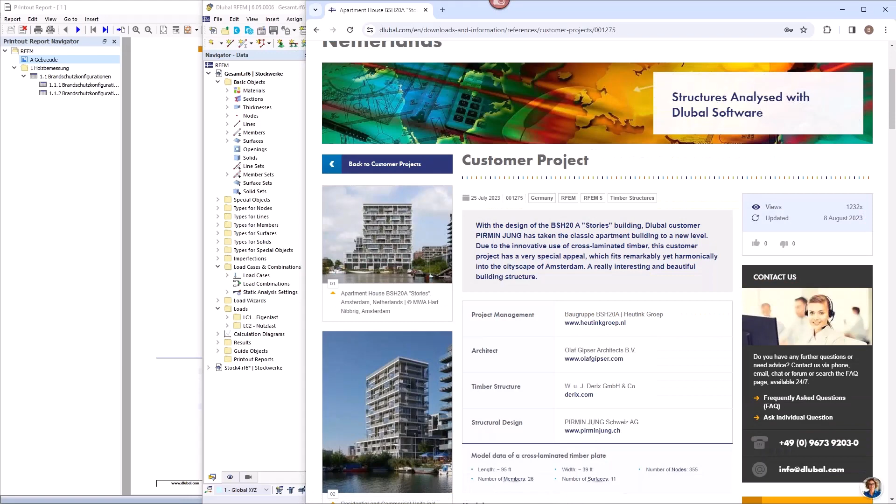Okay, so then I will shut off the camera and jump into the program. Before we jump into the program, the project that I want to show you is also on our homepage under customer projects. It was built last year. The static analysis has been done by the engineering company Pirmin Jung. They're using our software, that's the key. And this is the building, 13 stories.

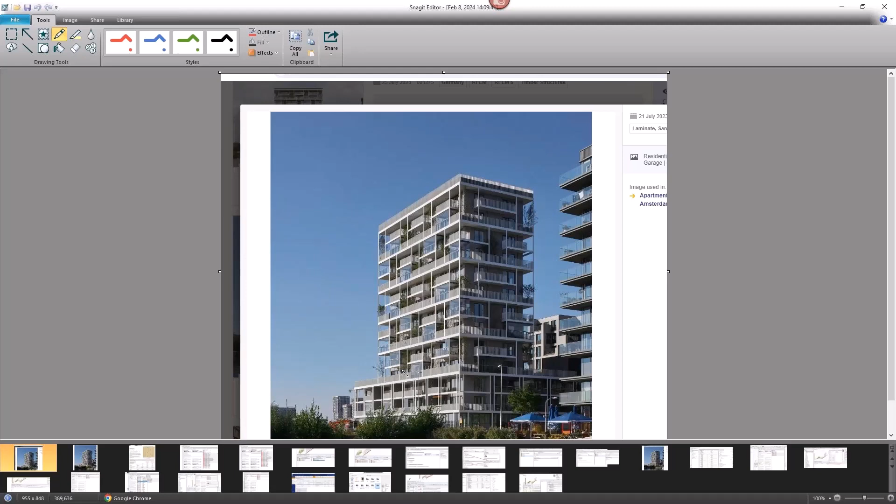The point we want to take a look on today is that there is, or what makes the building quite interesting, is that there's a smaller part that is upon the bigger part, and we want to take a look on this story 3 here. So how can you do this?

You can first of all make it with model in 3D and regard all construction analysis stages in the 3D model, or you can model it 2D and then connect each story via the option load transfer. This is the option I'm choosing here today. Today I'm only looking for vertical deformation forces, not horizontal forces for the stiffening of the system. I want to do that in a separate webinar later this year. Today, only vertical deflection and vibration, so wind load and earthquake we will not consider here today.

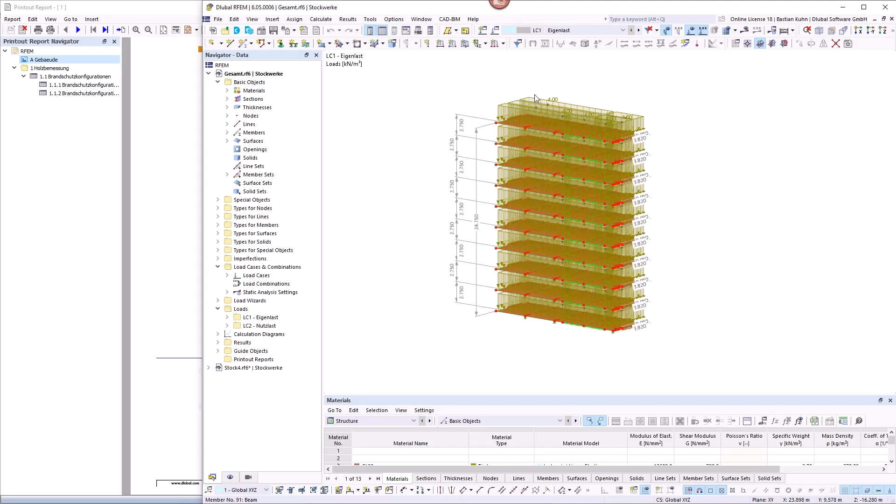As I said, I want to calculate that in a 2D structure, but with 3D effects. To give you an imagination of the structure, I just copied the top stories 4 to 13 in a separate position, so I make a simplified load case there for the self weight, 4 kilonewton per square meter, and the live load, 2.25 kilonewton per square meter, in each story. This gives you approximately a height of 25 meters for stories 4 to 13.

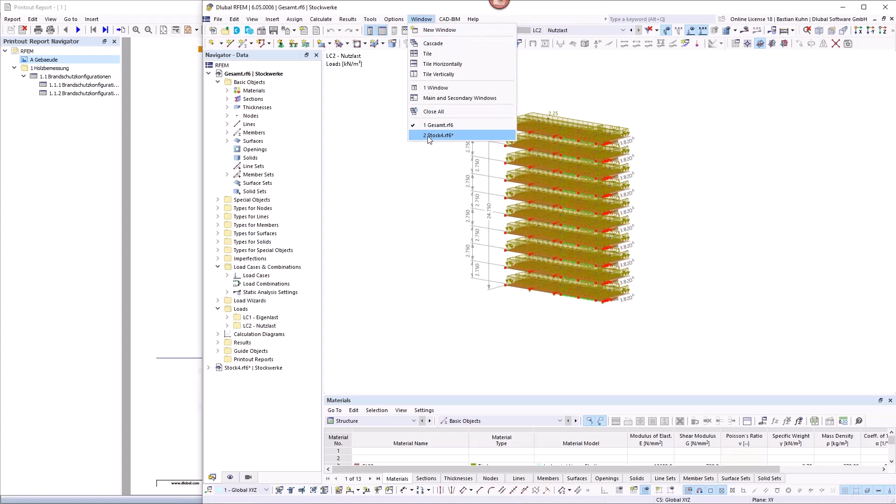Now how can you get the force from story 13 to story 12 and so on? Therefore I created separate 2D positions. Here is story 4, and I'll summarize them all - let me show you in the Windows navigator. So I have story 4, story 5, story 6, 7, 8, 9, 10, up to 13, and connected the forces from the top story above story 4 via the function 'import support reactions'.

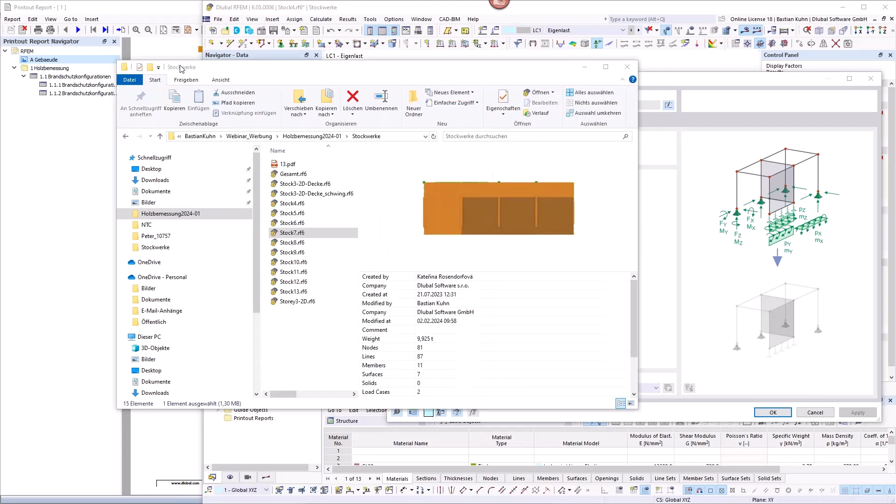There I can say, okay, I'm connecting story 5 here, so the resulting forces from story 5 go into this position, story 4. Then I can say, in the model with story 5, I have support nodes, support lines, and I'm importing them to the current model right here. I can automatically transfer the load case from load case 1 to load case 1 in the new story, and so on. This is how it works.

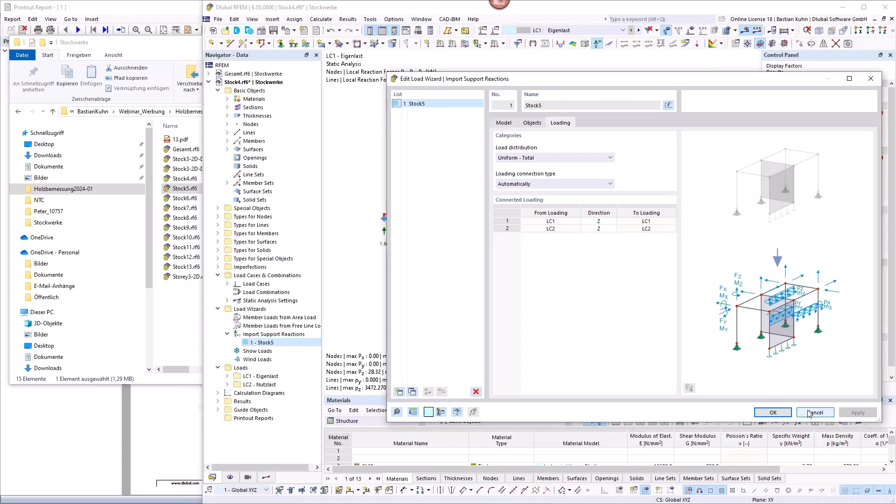I will put on the forces, or the load, and here you can see that I have point loads and line loads. If I activate it, I also have surface loads - as I mentioned, the 4 kilonewton per square meter for the self weight and the 2.25 for the live load.

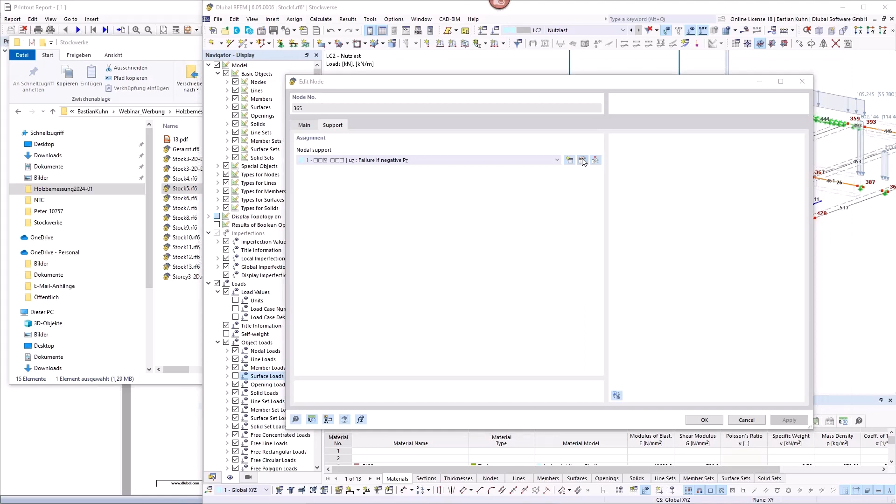But we just want to concentrate on the load that's coming from the other stories. You see here that in this part I also defined nonlinear nodal support behavior. It would also be possible to regard the settling or the construction stage via a spring constant here. All these points would be possible to regard and still transfer the load from one story to the other.

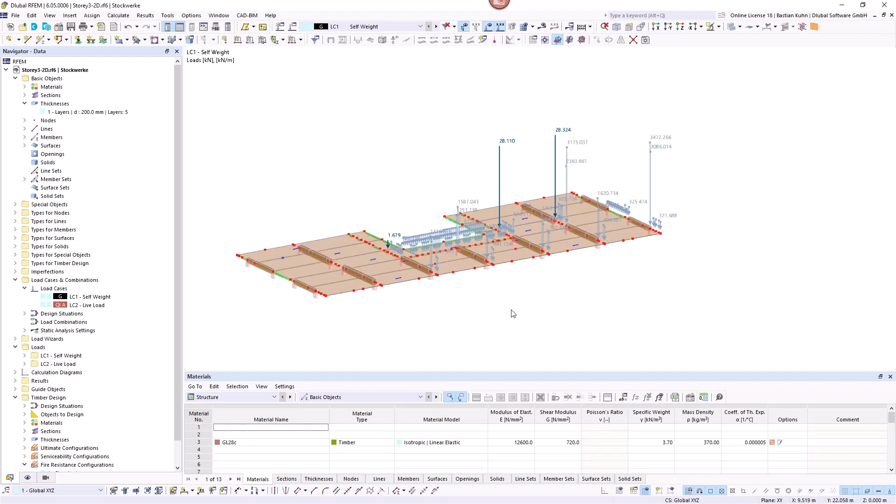Now when we go into the position that we want to analyze today, I think it gets much clearer, because I know it can be quite confusing, especially if you have not seen it before or did not work so often with RFEM 6 before. You see here, I'm in load case 1, self-weight. Also, when I activated the force in the first load case, 4 kilonewton per square meter, and 2.25 in the second load case. These are the only two load cases I want to analyze today. I said it is a simplification today.

I think the easiest way to understand what I'm doing here is to take a look at the point load. So we have 1.68 here and 28.11 there. Now when we look at the previous model from story 4 and take a look at the reaction in load case 1, you see that I have 1.68 here, and if we turn it around a little bit, 28.11 here.

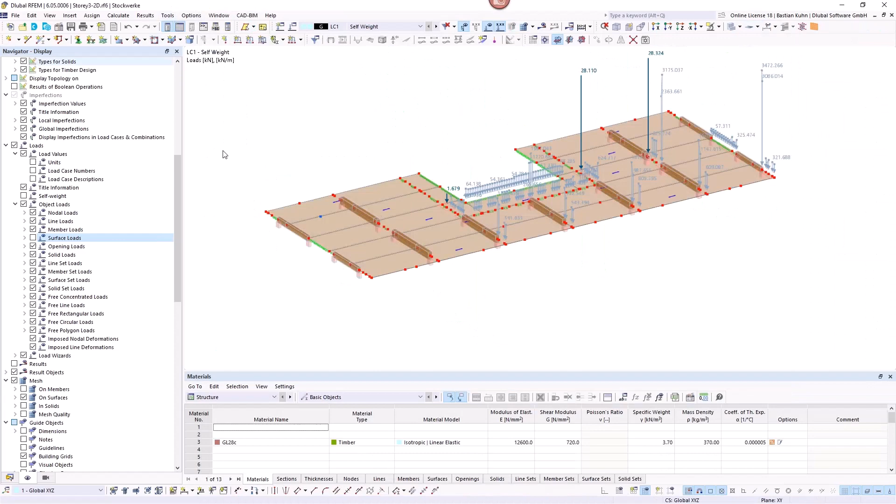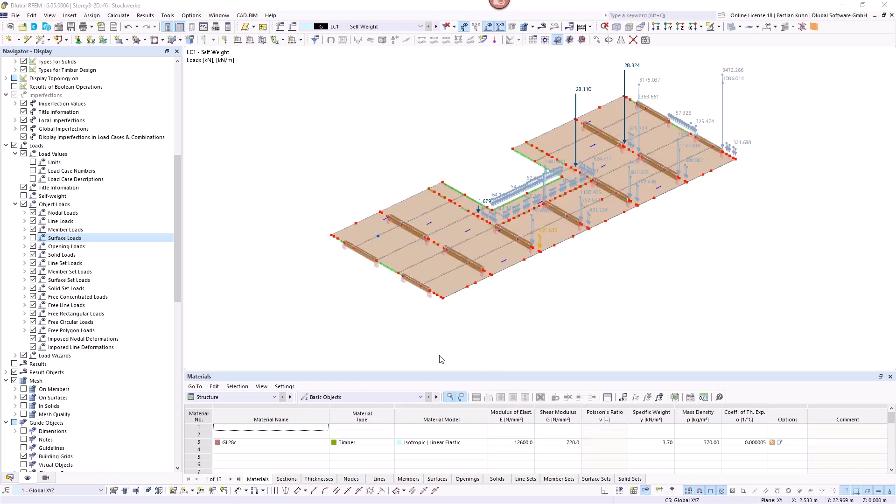Okay, to the structure itself. Now that we already have a whole bunch of questions, it's hard for me to follow them all. All right, there they are. I would like to show you also the dimensions of this structure that we are analyzing today. Therefore I just shortly switch them on. It has a length of nearly 30 meters and a width of 12 meters.

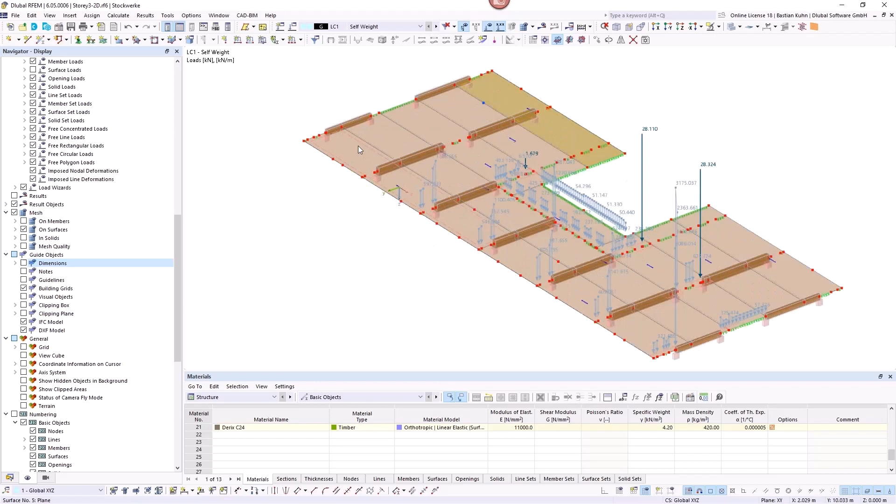I have several CLT plates in here. They are divided in an order so that they also can be produced and brought to the assembly. That's essential, that this is possible. And they are connected between those connecting points via screws, and the screws in our software are modeled via line hinges. There's another webinar where I get into this much more detail and also use a script function in order to calculate them. But today I just took the spring constant over from the existing project. So in X and Y direction, I defined this spring in here. So that's why it's connected.

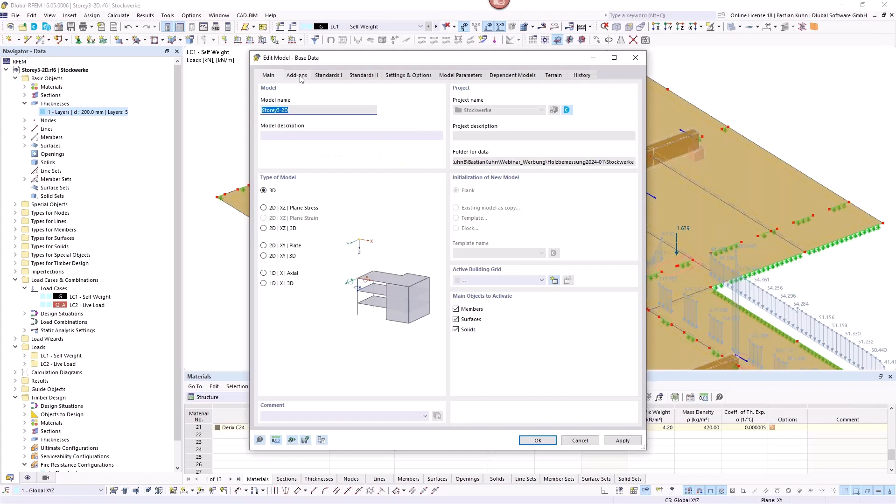The CLT plates themselves I generated with our add-on multi-layer surface. Maybe I'll go a little bit into the base data here. So it's this add-on multi-layer surface, and I'm designing all this stuff in the add-on timber design. When I define this layer, I have a database here with all the producers that we are offering right now. So you see, it's even possible to have a producer from Switzerland, maybe not this one, Schilliger, for example.

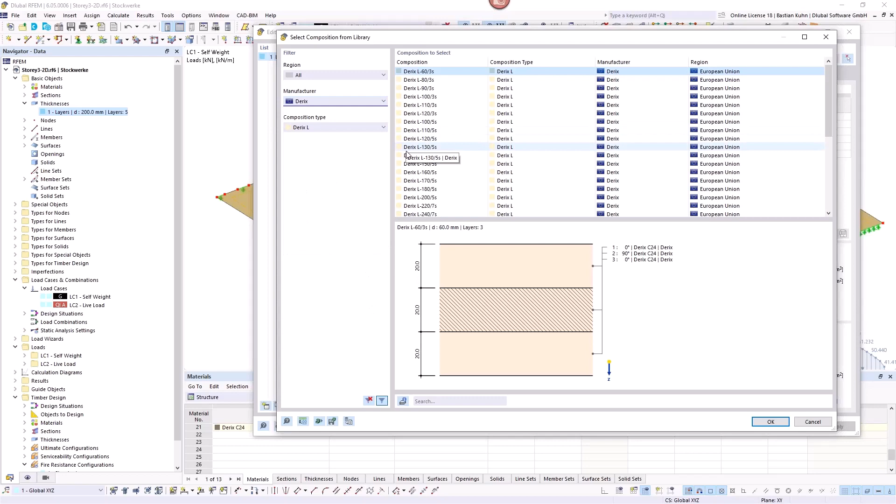But of course, all the European producers. And if you want to design in America or North America, Canada, then you can also have producers from there. Right now here, I choose the plate from the company Derix. And this gives me a certain amount of stiffness. I have other options here to regard the failure of net sections and failure including contact surface.

This is once again more for the webinar of the stiffening system for horizontal load, and I don't want to regard that today. But what I want to show you is that these layers here will generate a stiffness that we export into RFEM. So you see that this stiffness, if we're just looking for the top bending elements here, D11 is way more stiff than D22. So the stiffness in X direction is higher than in Y. That's timber, right? Obviously, there's nothing so fancy and new.

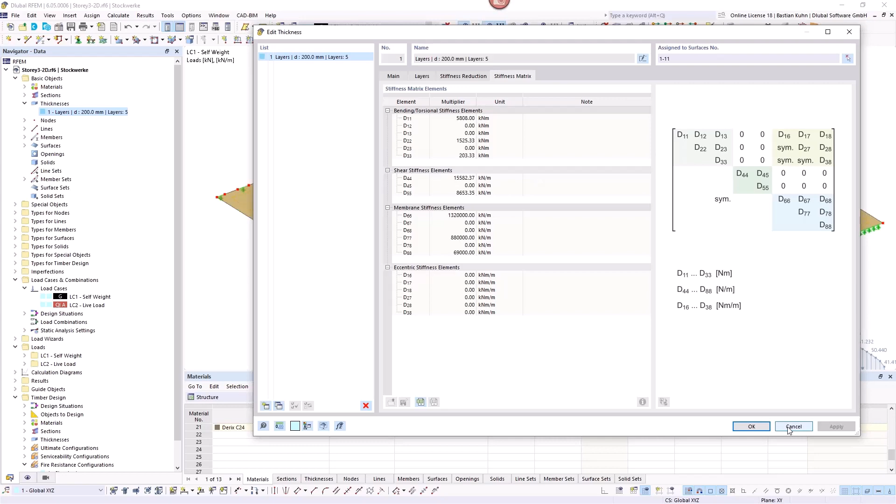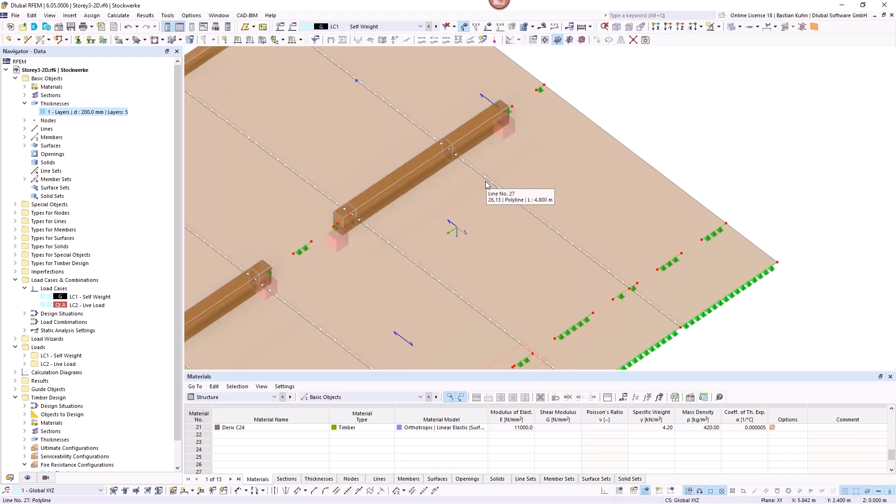But now, as a designer working and constructing it, you probably already realized the blue arrows here. In previous versions it was always hard to know how I'm assigning the plates. If we look for the downstand beams that I have underneath those plates, you see that there's a downstand beam supporting this plate, and this plate, and this one. Because of this connection point here, it would not be possible to design it economically without this part. That would be quite hard. At least with screws, it can be a problem. And therefore this beam was arranged here. It's a continuous beam from this point to this point.

And now when you want to arrange the stiffness, you probably say, okay, I have the span in global X direction, that's where I want to arrange my stiffness. So it's completely right what we did in here.

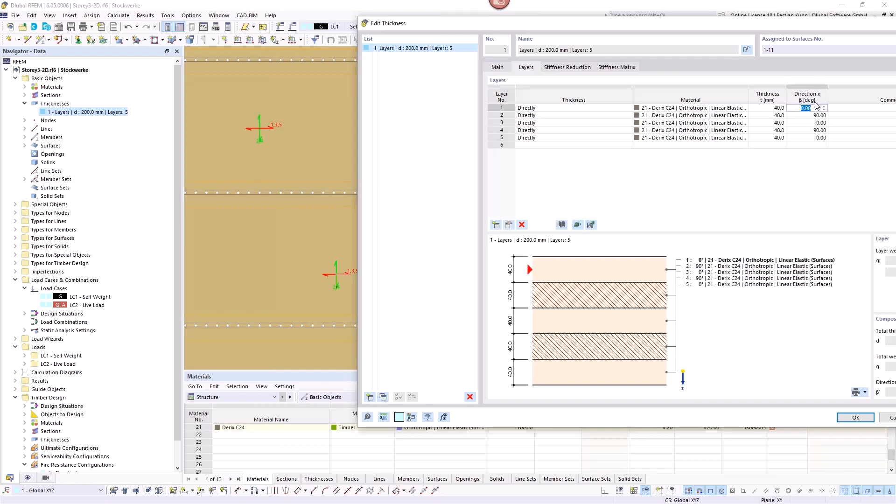We can also have it much more detailed if you want to look at each layer. I would just directly jump back to the thickness again, or maybe I can even have it here and then jump. So you see my first layer is oriented in 0 degree, the third one is in 0 degree direction, and also the fifth one. This is then the red arrow here, and the soft layers of the structure, which has less stiffness, is in this direction.

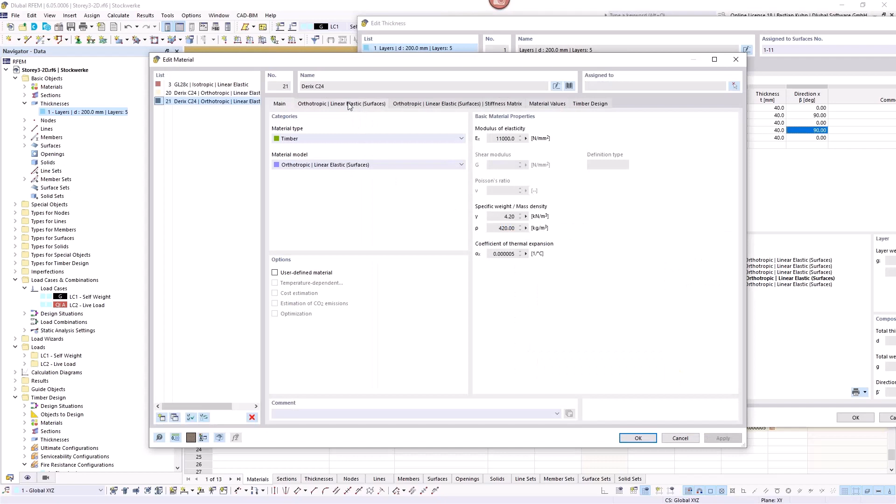I don't want to get too detailed, but in a CLT plate, you are always regarding the stiffness in X direction. Because of the orientation of 0 and 90 degrees, you still have stiffness in Y direction. You saw that in the stiffness matrix.

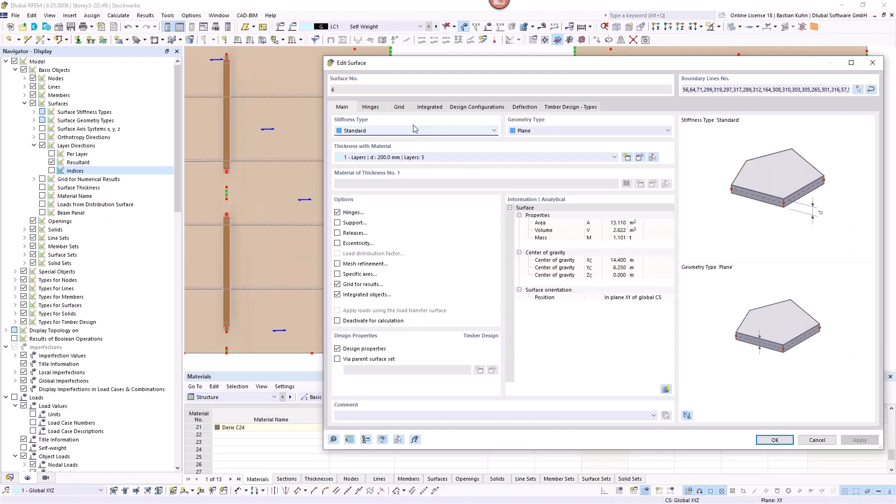So what I actually wanted to show is that you will directly get comfortable with the stiffness direction, and then as a constructor, you can directly see, okay, here it's correct to orient it this way, but here probably not, because there I have supports completely over the whole length, and I also have supports here, and there I definitely want to change that. How can you change this?

If you assign a specific axis and define it here by 90 degrees, the whole composition is changed, and you see it directly that the stiffness works.

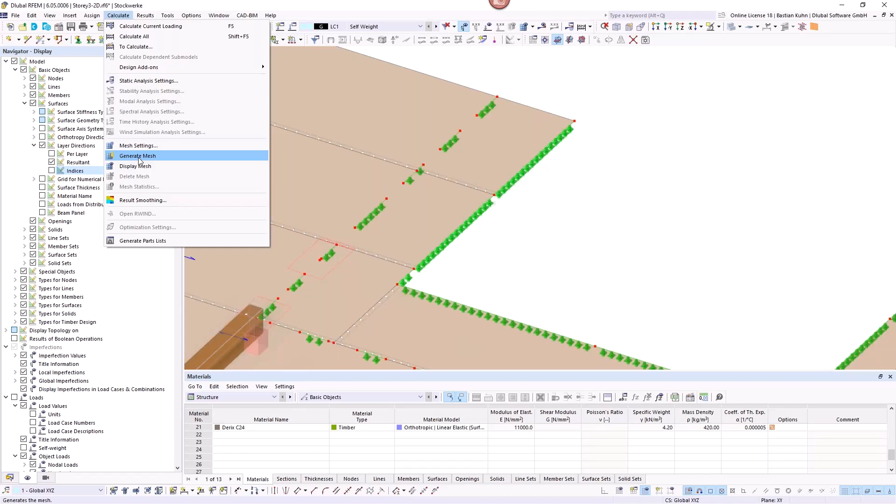All right, that is the plates. I also defined supports, well just simplified, also only vertical and not movable in X and Y direction, because I think as we are only looking for vertical forces and deformation, this is okay. I will generate the mesh just to show you another part of what I made in this model.

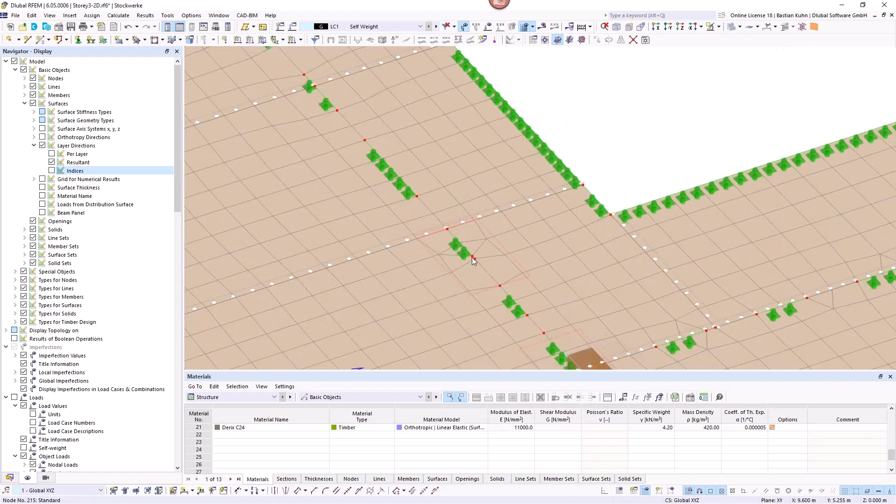I did take the whole load again, the example of the point load of 1.68, and defined it with a tiny little eccentricity to the support. In reality, when constructing this, you probably do not assign it to this node, what's the number... 439, you would probably assign it to node 215. But I did it this way, and this will definitely give you a singularity, which will never occur in real life.

Either you can put the force directly to this node, or if the distance gets bigger, there's also the option to define a surface result adjustment. This is what I did here, and I use this surface result adjustment wherever I have these problems.

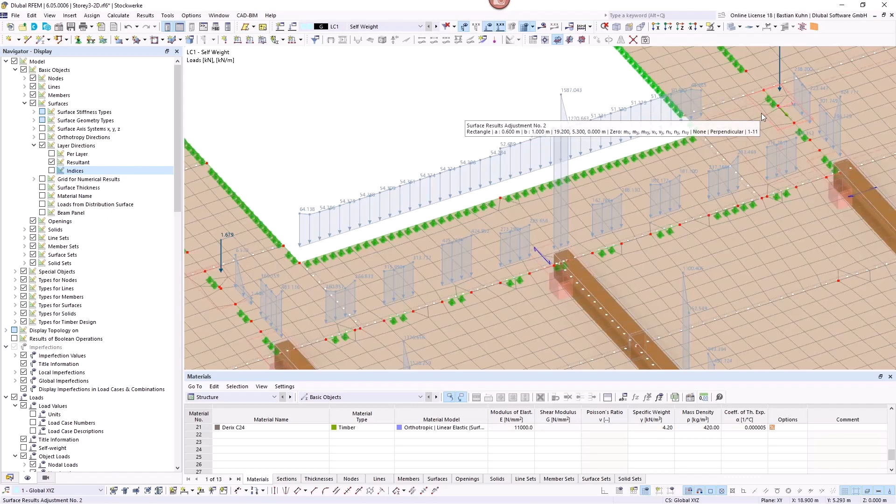I want to show you the advantages of this 2D system here. When I have it in 3D, it could be quite a lot more work to regard it. And also when you say, okay, a downstand beam here, maybe I don't want one, this would also be easier in this position.

Okay, we switch off the load again and come to the beam forces we did. The beam is supporting the plates because they have connection points in here. Otherwise, it would not be possible to assemble them, or to produce them and to assemble them. Both would not be possible. And of course, the engineer divided the beam at these connection points.

It is not necessary with RFEM 6 to divide it, but he did it. And now, how do you regard that as a continuous beam? You will use the option member set.

Okay, when we are already in member set, we can directly take a look at the design types of this beam. We don't want to look for stability today, as we do not have any kind of buckling. And we could also argue that lateral torsional buckling does not play a role here because we have constructive fixing on the top of it, so this will not occur.

That brings us directly to the design configuration. Well, the ultimate limit state configuration is then also not so much to do. You can consider the system strength factor, that would be something probably quite relevant in case we get right to the borders of the loading with the members. As I said, stability we do not do. And we also have the system strength factor for the surfaces.

So it's always divided into ultimate limit state and serviceability limit state, in the definition for members and surfaces. It's more or less the same what you input here.

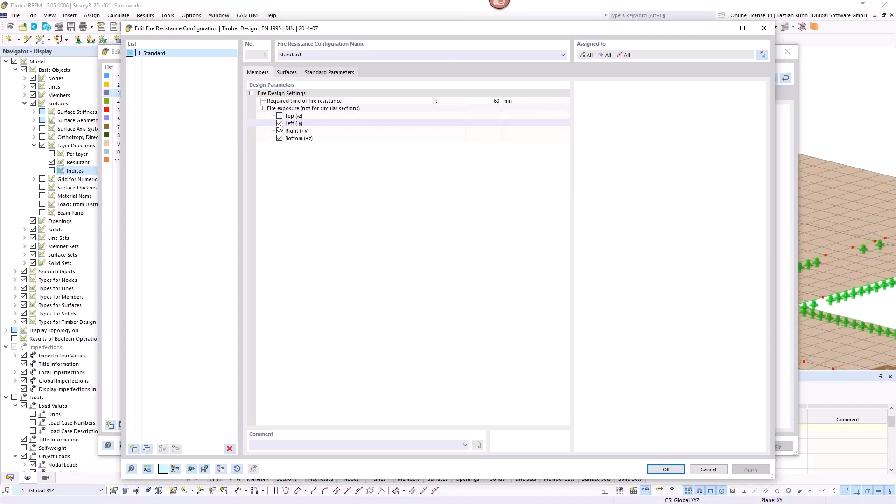Fire resistance verification configuration, that is the new point I want to show you for surfaces. Therefore, I will not show that for the members right now. For the member, I want a required time of fire resistance of 60 minutes. And because it's covered on top by the plate, I skip that and say it's only burning left, right, and bottom. 60 minutes, that's what I'm defining.

Then what else can we define for the beams? We can define a member support at the member start and end, in this case. Here I said, okay, I have a support length of 30 centimeters, which is quite long.

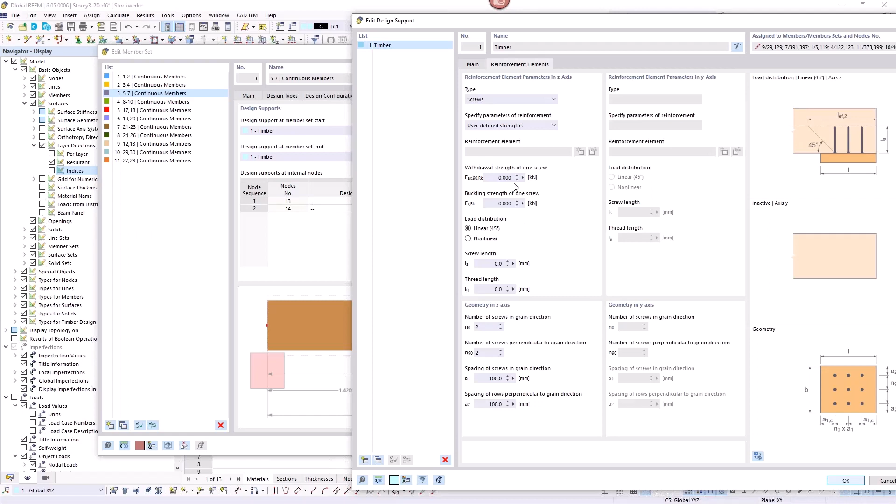Possibly you want to reduce that later on. I'm using shear force reduction that I can always activate. In case I have a shorter support length, I would maybe also want to reinforce the support via screws or with a user-defined strength. All this would be possible. And in order to regard the softwood, I can also increase the factor kc,90 by the factor 1.5.

All right, deformation is nothing I have to do much special on today. I'm just using the reference lengths. I will come to that when we look for the surfaces.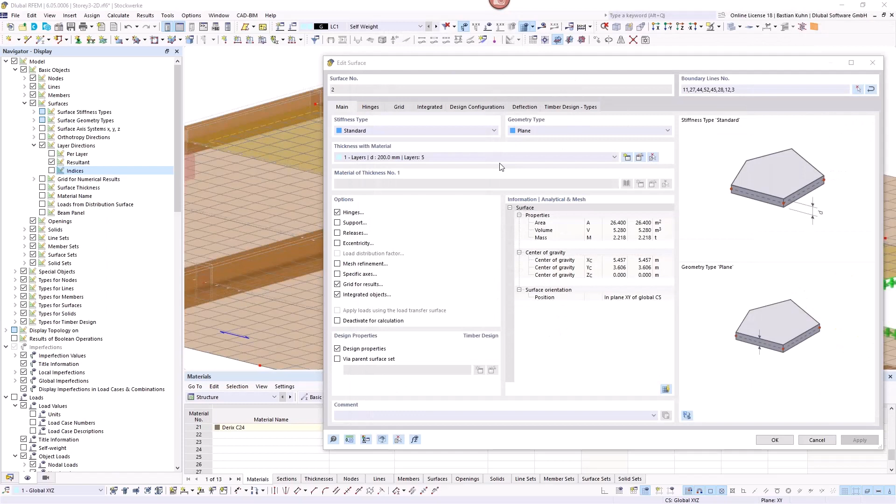And we will take this one here, this surface, and take a look for the design configurations again. The information of the thickness I showed you already, just so that you know what we are defining here. We have these reduction factors in here, which play a significant role for the design. That is all transferred into the stiffness of the structure.

Okay, ultimate limit state, serviceability limit state, I showed already. There's not much special to say, but fire resistance. This is the main reason that we are doing this webinar here today for you, because we are really happy that we are able to regard fire resistance verification for CLT plates now, and we can regard it correctly with correct reduced stiffness and all these points. I will come to that once we did the verification or have the verification ready.

So I'm saying I want a required time of fire resistance of 90 minutes, which is quite long. And the default setting here is non-heat-proof glue, not the glue, but the glue or adhesion of cross-laminated timber, which means this is the standard glue taken by the producers. So be aware to take this one.

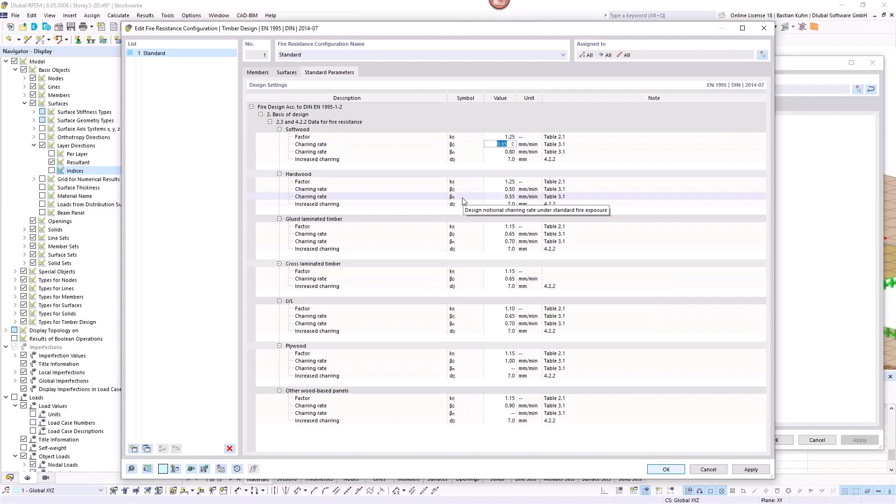And the burning rate that we have in here, we can also control in the standard parameters, and it's probably quite interesting to take a look into that. The charring rate is for cross-laminated timber similar as for softwood, 0.65 millimeter per minute. So you say 0.65 millimeter per the first 25 millimeter thickness.

Then when one part of the structure is burned, or of the layer is burned, it comes into the area where the glue, the adhesion, works in the connection of the two boards. You have to double the rate, or maybe there are other rules where you even have to increase it. So you say not 0.65, but in this area where the glue is, you say 1.3 millimeter per minute. So that's quite a lot. And that's how it is regarded.

In case one layer of the plate is burned nearly completely, maybe we take a look at the layers again. So if you say, okay, the bottom layer here, where I am with 4 centimeters thickness, is burned completely, then of course it cannot bear any force or any stress anymore. And then there's also the rule to say, okay, when it's burned equal or less than 3 millimeters, it has to be completely skipped out of the design for the stiffness and the stress.

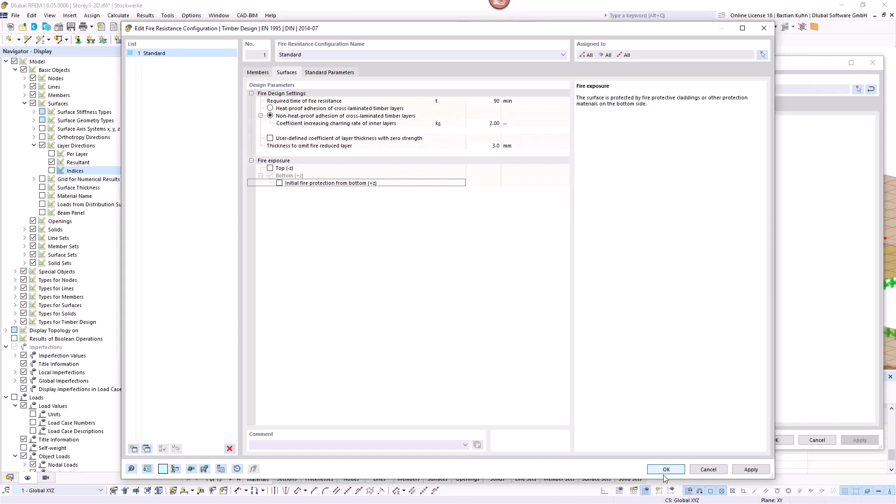In case the bottom is also planked by, for example, gypsum or something else, you can calculate an insulation coefficient according to, once again, for example, the planking thickness, and then the factor K2 should be less than 1. But here today we say, okay, I'm working with this and we will try this one. This is the very important fire resistance, and we will do the combination, do the design, and then come definitely back to this configuration and take a look on it again.

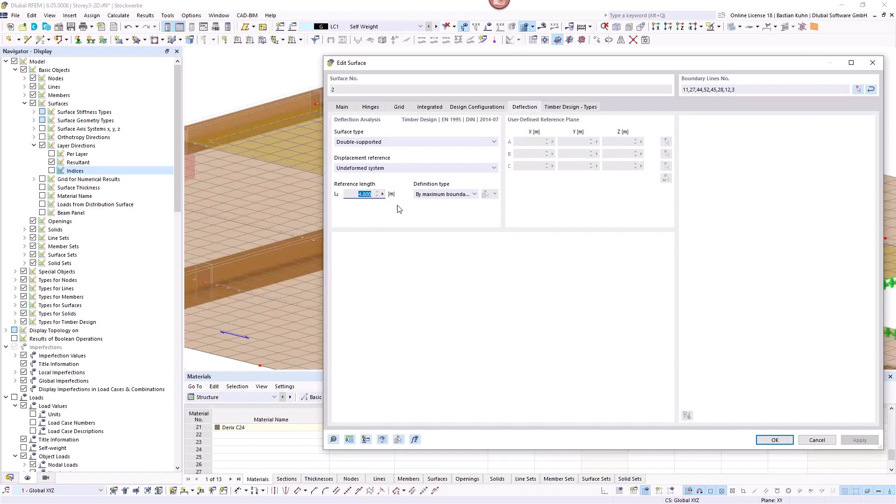Deflection was predefined with the maximum boundary length, which is all right in here. It's from this to this point, 4.8 meters. Of course, and in most of the cases you would want to have it, you can also select a length, but you see here, this line is 4.8 meters, so you can really take it this way. Okay, and the service class is similar as for the downstand beams, 1 in this case.

All right, this is the point, and we will get to the combination. I hope I did not miss important stuff, but I don't think so. Okay, we're doing a combination according to Eurocode 5 with the German annex.

Of course, a whole bunch of other annexes are possible, and a whole bunch of standards for any other country is possible here. Once again, we have only load case 1 and 2 for sake of simplification.

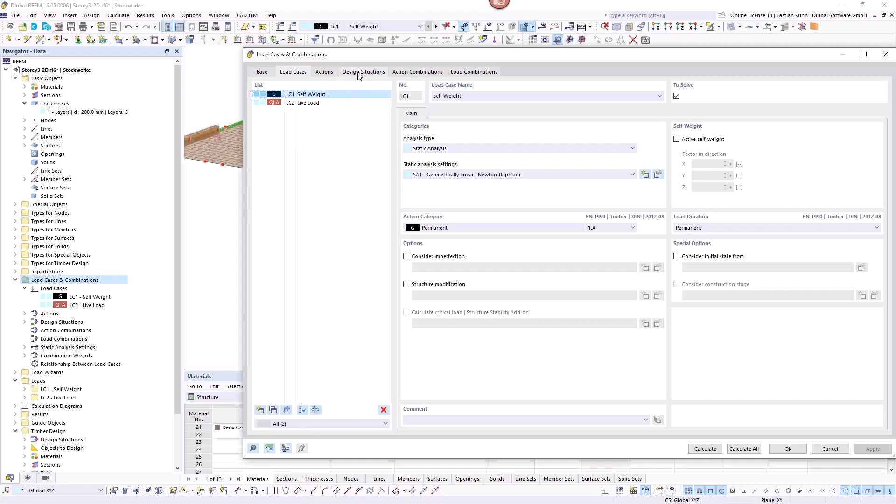Design situation is predefined with permanent for ultimate limit state, and in Germany we have 3 combinations for serviceability limit state: characteristic, which is the initial deformation of the structure, and quasi-permanent and characteristic quasi-permanent with regard to the creeping. So these 2 serviceability limit state verifications will also regard creeping.

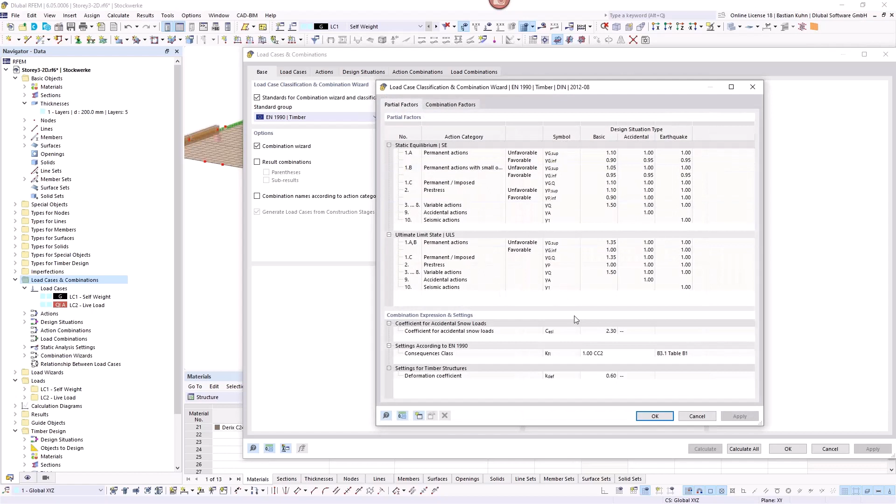The creeping you can define in the basics with settings for timber structure. In case your structure gets nonlinear, you have to regard the creeping factors in stiffness modification, but we do not have this case here. And of course, we also want to do fire resistance verification.

Therefore, once again, in Germany, it is recommended to use the accidental combination for fire with psi11, which means that your factor psi11 is put in front of the summation. But of course, it's also possible to use the other summation where you have it inside the summation.

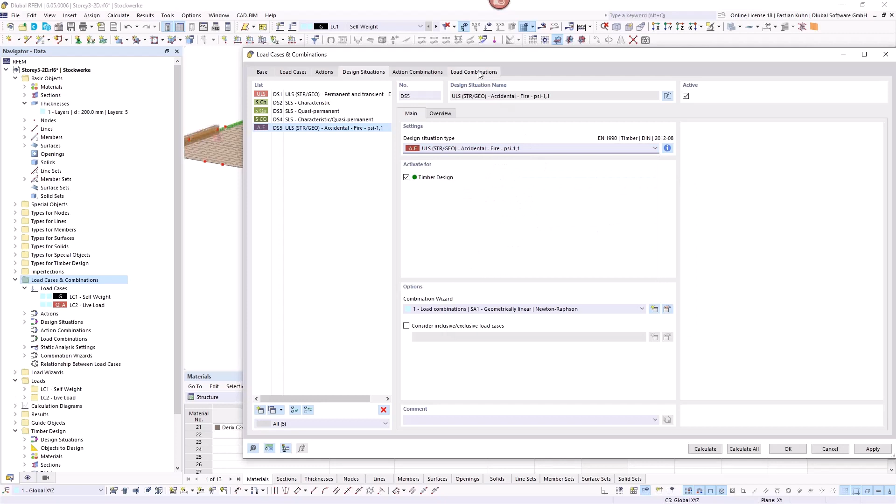Okay, so this is the one we are using here, and then we can do our combination. Quite nice, quite short, not much to combine when you have only 2 load cases.

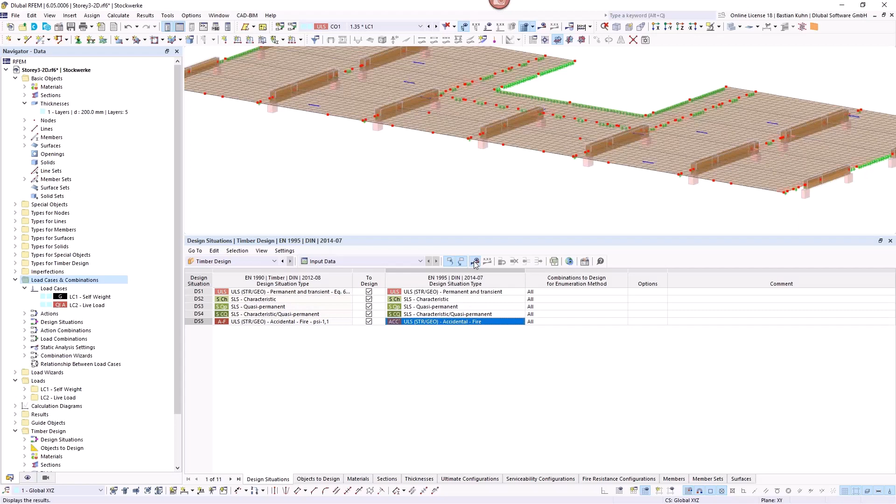And then the only thing left to do is go into the timber design and say what you want to verify. So we want, once again, verify ultimate limit state and serviceability limit state. And here is correctly assigned the accidental fire. Vibration we will do later on.

I let the software now calculate, because this gives me the opportunity to show you the printout report a bit more detailed. Maybe you already asked yourself, it's nice that I can connect several models within one model and have the forces from all of them, but how can I do the documentation of this? I cannot say to the other engineers I magically just have the forces somewhere. You probably need the documentation for this, and that is what I want to show you during the calculation.

And here I'm opening again the model with story 4. And here you have an option... so for example, what you definitely want to have in your documentation is the reaction force from the story, and probably a whole bunch of other parts, but I don't have the aim to make you a complete printout report.

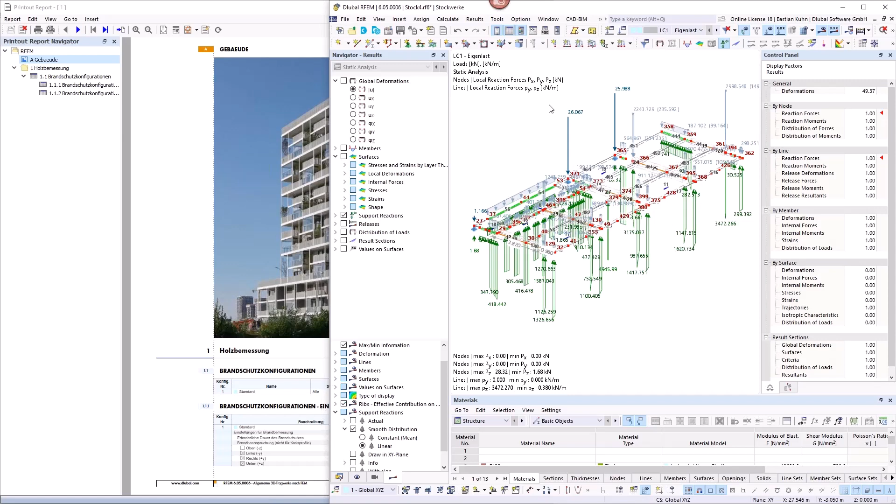I just want to show you how to connect several parts of the other model into this one model. Let's say we have story 4, and this is connected to stories 5, 6, 7, 8, to all the other stories in here. This is something I want to print to the clipboard. Then when I go into the printout report from the model where I'm working on, I can say this is from story 4, say okay, and have it imported.

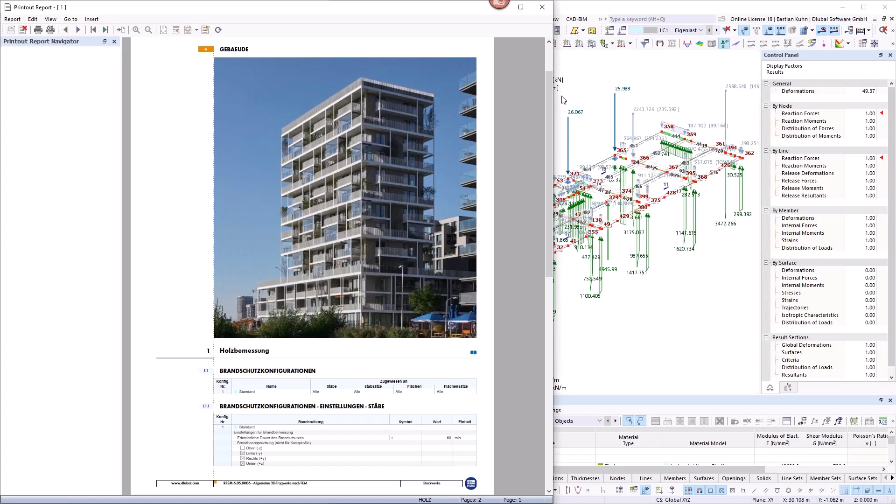And while it is loading, I can, for example, open another model. Let's say this one. It's maybe not so interesting to have, but let's say we want this with 25 meters and each story also into the global printout report. You can have that here.

Of course, right now it's not over the whole front, so this is something you always can change via right click properties, maybe no comments, whatever. So this is all possible.

And one other point that is possible is to say, okay, I don't want to have it from another model. I want to have PDFs and unify them into one big printout report. This is also possible in here.

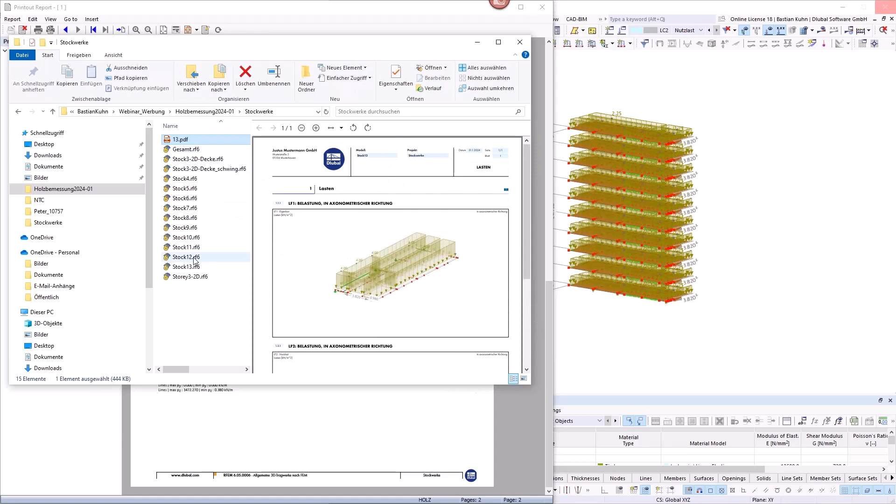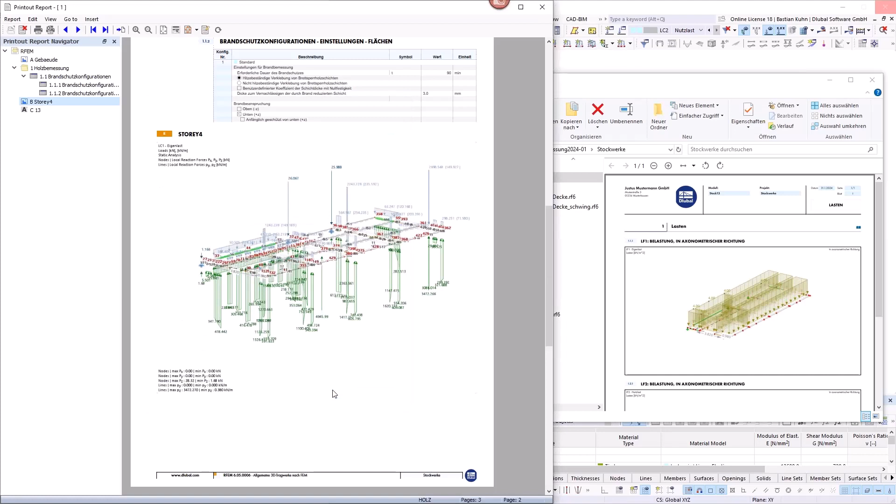For example, I just copy the load from story 13, the top story in here. And when I go once again, insert PDF and select this one, go opening, and for example, I say all pages. There is a whole bunch of options. Import it, and then I also have this PDF inside it.

Okay, these are the options we have for the printout report. Maybe I don't want to take a too detailed look into the printout report, but of course, when you go into the settings of it, you have all options to, for example, regard the fire resistance configuration.

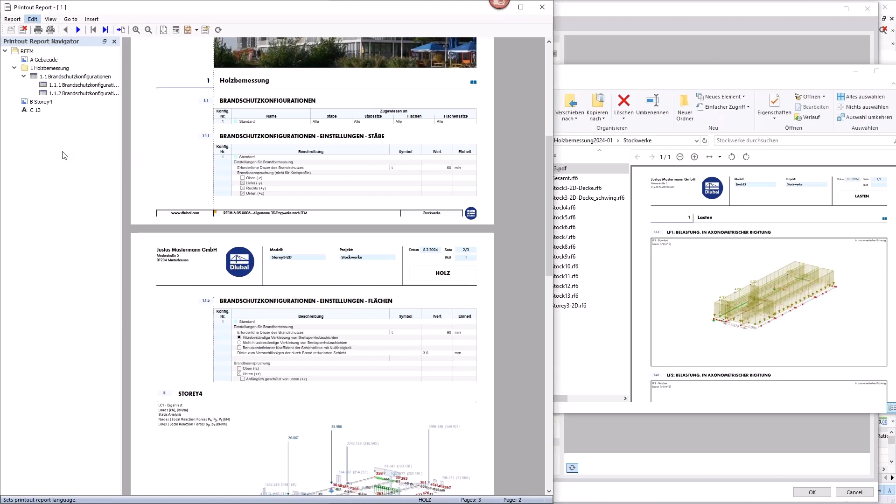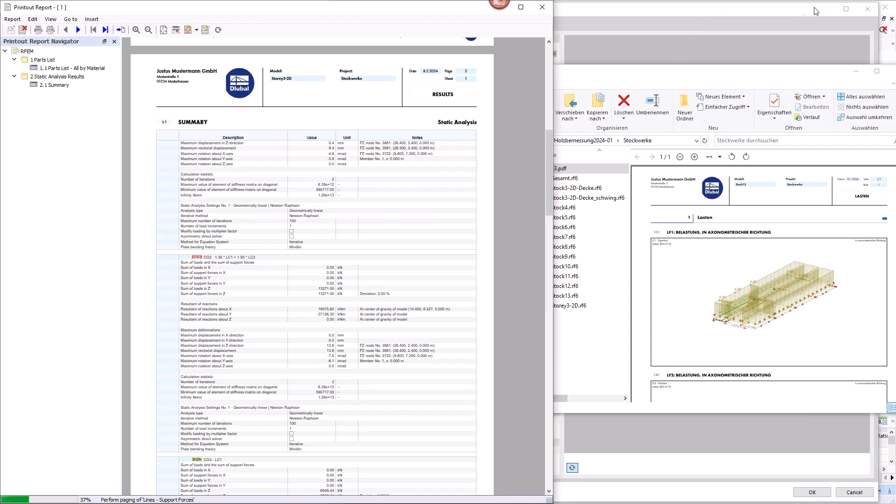Oh sorry, this is in German, this was my fault. Once again, we probably should change the language into English. But this is also possible, similar to the software, it's also possible to change the language. Yeah, so here you see, now it's there, and we have the language in English. So that's also possible, okay, so that we don't need.

I think the calculation is now ready. Yes, so that's fine.

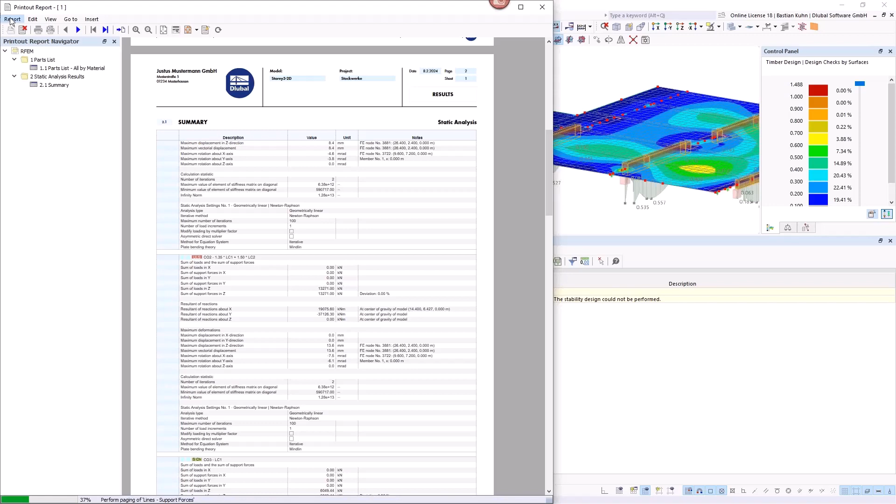Now it's loading all the points to the printout report. That was maybe not the smartest way of doing it, I should have left that. But we can wait a few seconds. Now it's ready, because it's loading all the stuff into the printout report that I should have skipped. So the design of the structure is ready.

And the overview at first says, yeah, not really a bigger problem. When we look for the design ratios on the member, that looks quite okay in here. We can also take a look on it graphically.

Maybe we take a look at the biggest loading for ultimate limit state. This is the bending. We can also take a look at the compression, just to have an example or an imagination. So you see, 50% loaded. The length is definitely too long that I chose in here, and maybe we can also decrease the size of the section. Anyway, here's the pressure support verification done, and you have an equation that you can put also to the printout report.

Then have a nice documentation of it. Serviceability limit state without the vibration is also not really a problem in here.

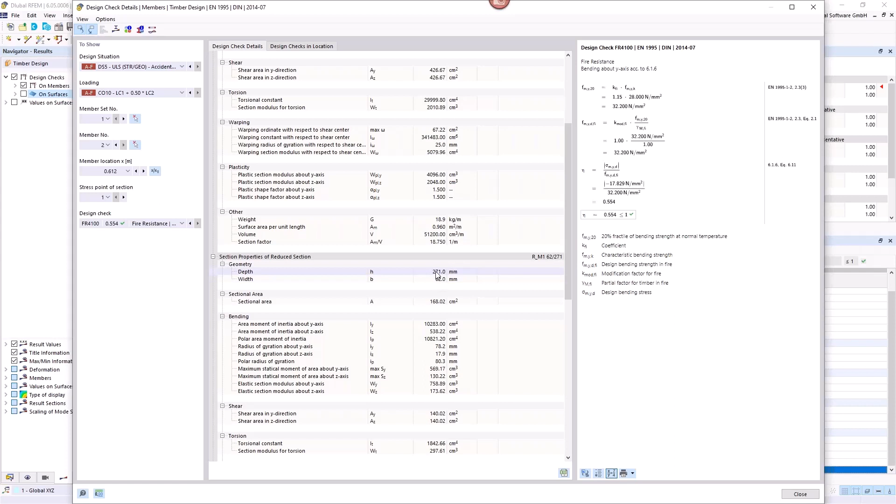And fire resistance, we also take the biggest loaded area or beam, not area, because I think it's always interesting to see how this is done. So the original height was 32 centimeters with a width of 16 centimeters. And because of my burning rates and my fire exposure on the sides, it is reduced to 6.2 centimeters and a height of 27.1. And then the verification, in this case for bending, is done again with this reduced section.

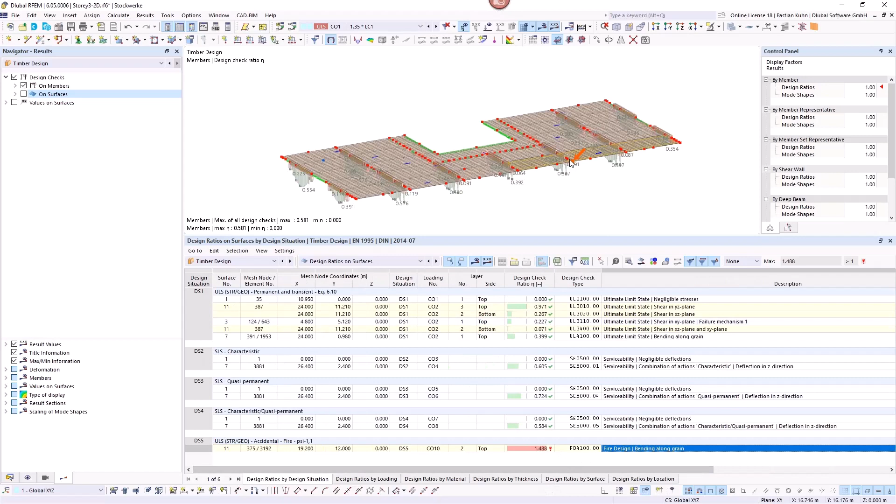Okay, that's the beams. Now we will jump to the surfaces. And here you see already, the fire resistance, that is not really so nice looking in here. I mean, it's only a small part of the structure. Hold on, we will get the graphics on again because I skipped that.

There can also be defined an average region or a surface result adjustment, just like I did in this part here. That would definitely be possible. And I'd say 20-30% is something that is probably possible to have it, at least if it's such a tiny high peak in here. It's something you can always do, but I want to try something different in here.

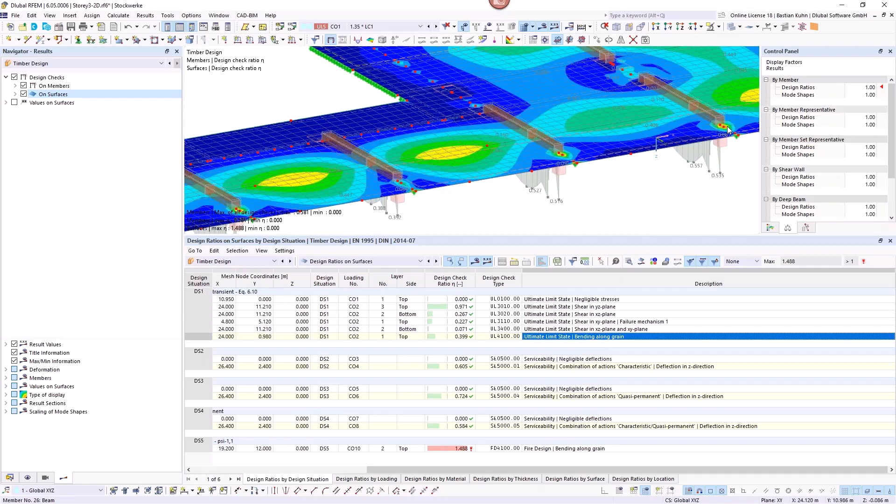Before we do that, we take also a look to the other loadings inside here. Yeah, the shear for the punching through area is design giving in here on this part. That's the usual punching through area, what you want to take a look on.

And we can maybe also take a look at the stress over the whole section, because I think that's always nice to see. And you see for the bending, how the stress is transferred into each layer of our section or our surface.

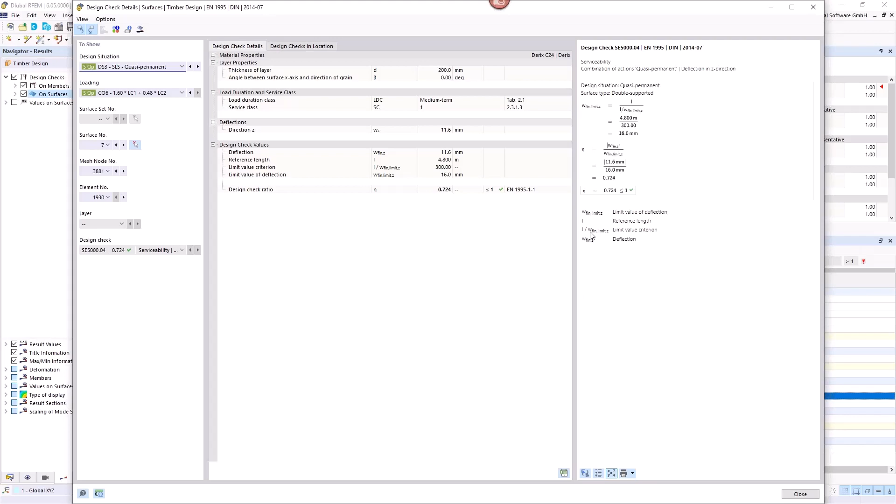Okay, serviceability, that's just deflection. We can take a look also on the details, but I want to show you that via the vibration analysis later on. You see, it's just that we take the limit deformation of 16 millimeters and use this for dividing the existing deformation in this serviceability state.

And that brings us to the fire resistance, where we have this high overloading. It's quite interesting when we look for the result diagram that I showed you for the ultimate limit state before, because now you see our intelligence behind it. You see, because of the burning, the fifth and the fourth layer is burned completely. And this is not only for the stress, but also for the stiffness. The stiffness matrix that I showed is reduced for the load combination 9 and 10.

And yeah, you see, of course, now I have only one layer in here taking stress, because this other one has, in this direction where I'm looking on the stiffness, zero. So that's, of course, the worst case that could happen. So 90 minutes with this glue that I'm using here, it will never work, I think.

So that's just quite too ambitious what I tried. Nevertheless, before we change something, we will use it again in here and take a look at the charring depths inside.

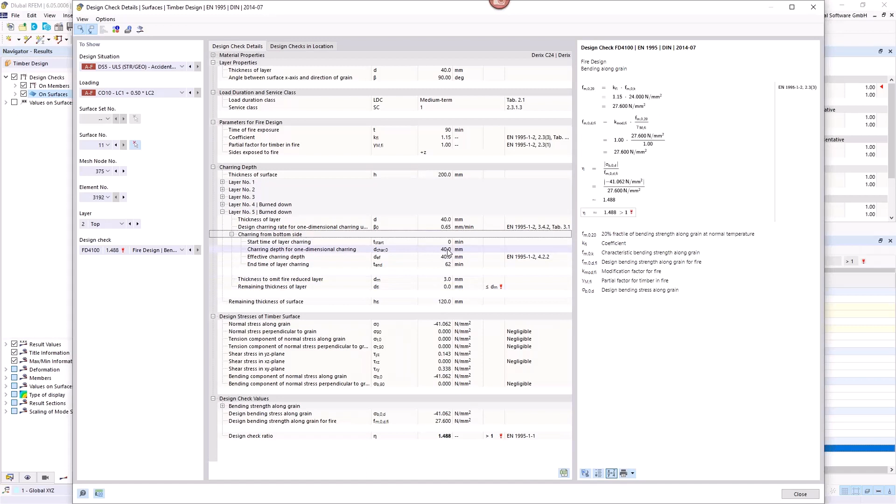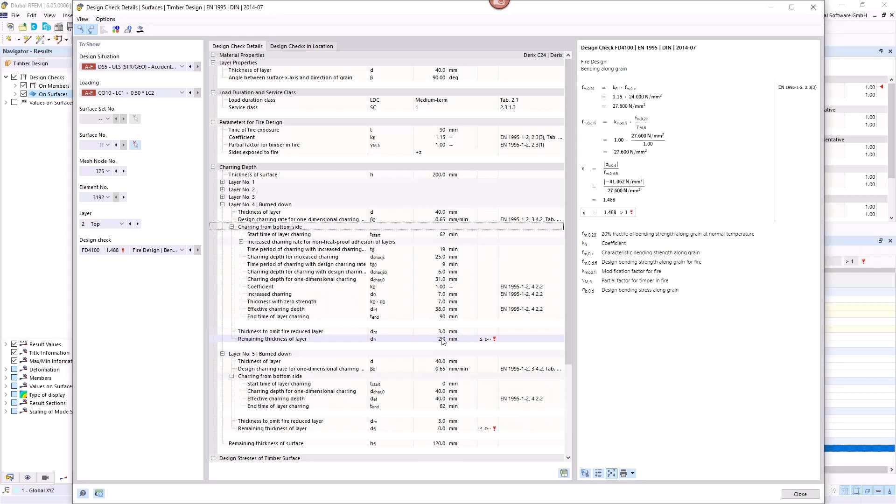So layer 5, I told that already, is burned completely, of course. By 90 minutes, there's nothing to talk about. But layer 4 can be quite interesting, because I usually had a remaining thickness of the layer of 2 millimeters, but because of this rule that I just showed you, it is burned completely now and has no more bearing capacity. So it's defined to zero.

Okay, you probably expected what I'm doing now, because I introduced that long time ago. The easiest way to increase this now is to use a heat-proof adhesion of cross-laminated layers, because now I don't have to double the burning rates. And you saw it probably, it tells me that it needs to delete the combination 9 and 10.

Why is this necessary? Because the stiffness in the combination 9 and 10 is also reduced by this new charring rate. So we have to export the stiffness matrix for this combination back again into the program, get the inner forces, and calculate it again. And hopefully now, we cross our fingers. We hope that it will work.

Okay, it should usually not take that long, because we only have these 2 combinations, and also for the timber design or the timber verification, it's just in brackets just the fire resistance where we need to do the stress analysis again. Still, I know there are a lot of parts to be verified.

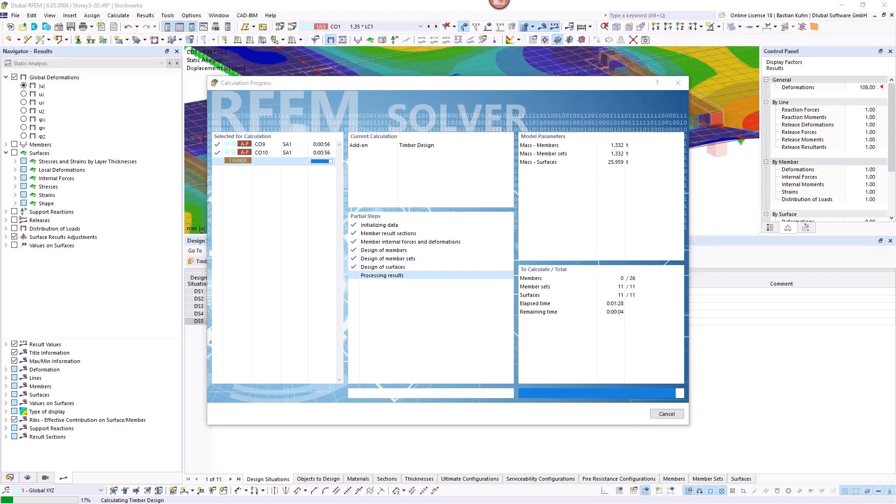Yeah, and there we are already. I'm just scrolling a little bit through the questions, but Gerhard answered them all, and there's not really much questions coming doubled. What can we take a separate look on? No, I can't really see it. Okay, so yeah, but there we have it. I would have shown something else, but now we have the results.

And then we directly jump into the surfaces and look to the fire resistance. And yeah, perfect. You see, I nearly have 100% less loading on the structure, because yeah, just by this better glue that I'm using in here.

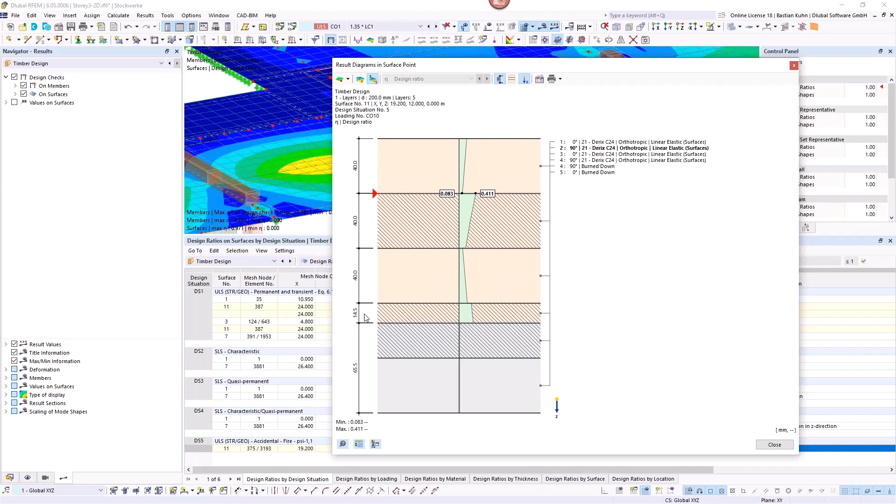And now we can also take a look to this graphic again, and now you see it already: 14.5 millimeters do remain. And yeah, when we take a look at the stress, this bottom layer here just gives me so much more load bearing capacity, that it's just the smartest way for me to do it. In the details you will definitely see the same when you go to charring depths, and then you see here that this is still working.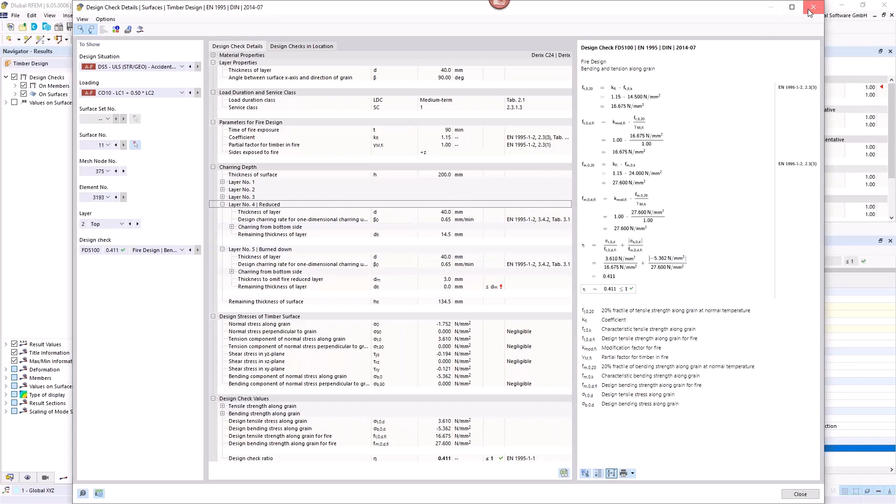So yeah, once again, this is really a big jump. I don't know a software out there that is calculating 2D surface elements, assigning a fire resistance verification by also reducing the stiffness. I mean, there's probably some softwares that will reduce or have the reduced section, but they will not reduce the stiffness. So it's quite important if you look at the effects that it has in here. That is what we are very proud of, that we have it in our software now, and I think it's one of the best things you can have.

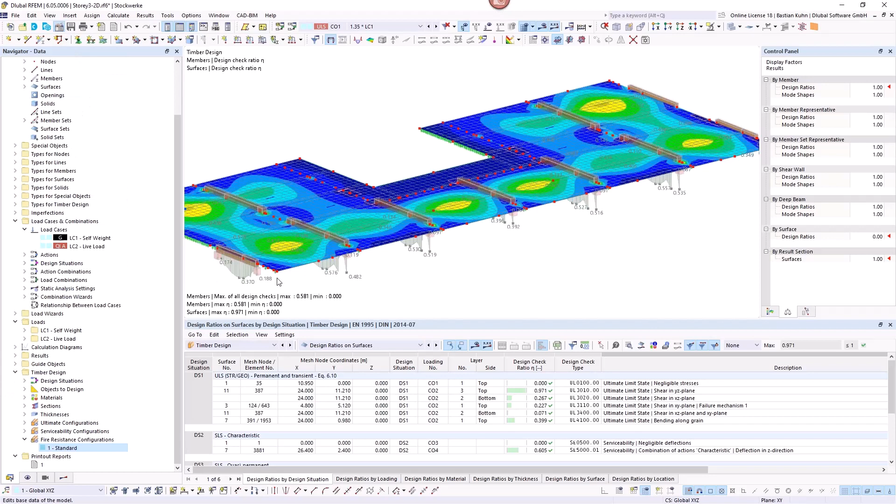Okay, this, and now was only missing the vibration analysis. I want to show you the simplified vibration analysis as a first step.

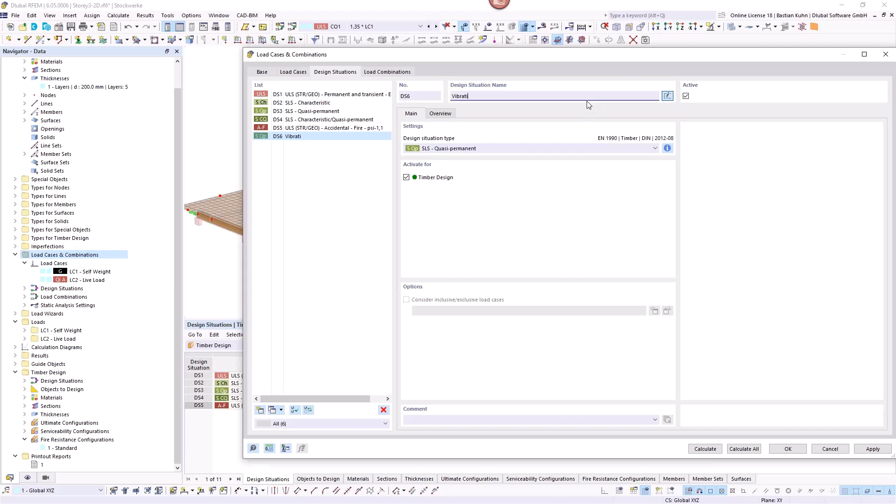Therefore, I'm shutting off the combination wizard and will just define one more additional design situation for vibration, and have in the load combination also one more load case that I'm assigning to this, with 100% of the self weight and 30% of the live load.

And yeah, I don't think you want to see the calculation again for all the other objects to design, so I'm just doing the simplified vibration analysis again. You see now I have only one combination and only deflection that I'm showing in here, so that would be quite good and quick. That's the point I want to have in here.

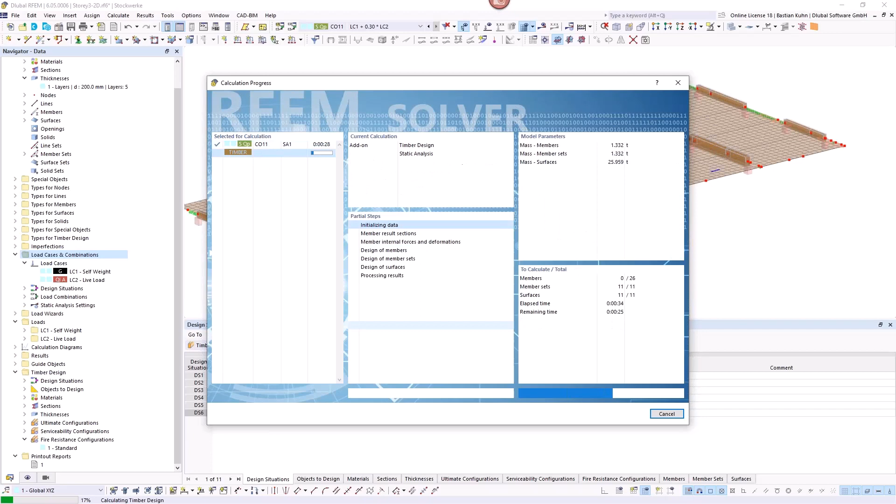The simplified vibration analysis is similar to the SLS verification, looking for where is the biggest deformation, and this is then divided by the limit deformation of 5 millimeters. I showed it to you in the configuration settings, and you see everything's red. That's not nice.

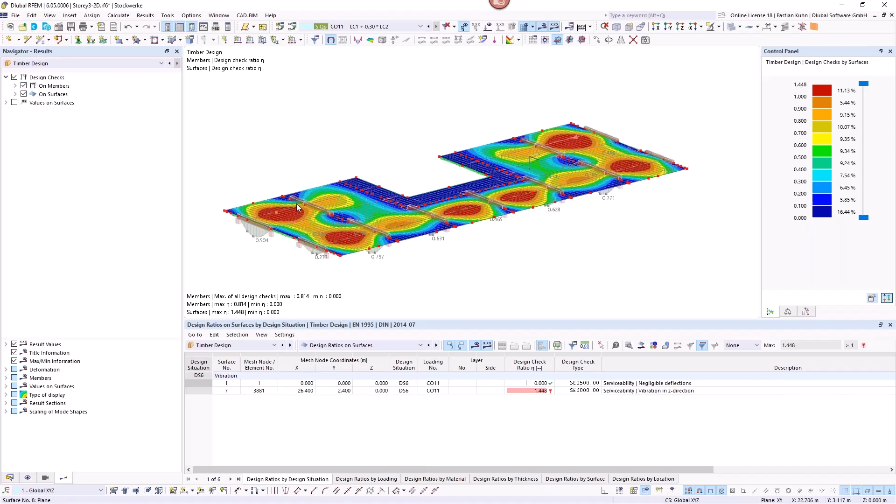If you look at the members, there's not really a problem in here. But of course, for the surfaces here in this area and in this area, you have the biggest overloading - 44.8% overloading of it. Now, how can you address that?

There are several ways how to do this. What we here in Germany do most of the time is the analysis by so-called Hamm-Richter. What does that mean? It means that we are calculating the frequencies of the structure. Therefore, I'm copying or assigning a new load case and give it the analysis type modal analysis, and import the load case 1 as a mass in here. And I need another load case for the stiffness criteria. This is the way how this is done.

I will just show you what it means. So when we look at the modal analysis in load case 3, we will calculate the frequency or the hertz rates of the structure. And now in this method there is a rule that when you are in independent structures, you should be above a hertz rate of 8. And when you are in dependent areas, so when your own family is introducing the frequency, you should be over 6 hertz.

Okay, so that worked for the second rule, but not for the first one. So you have two ways to do it. You can either get it stiffer, but it's not really in this problematic part - it's more in this part here where you can try to arrange something. But if you argue, okay, I have maybe a dependent area here, it is fulfilled here. At least it is not 44.8% overloaded.

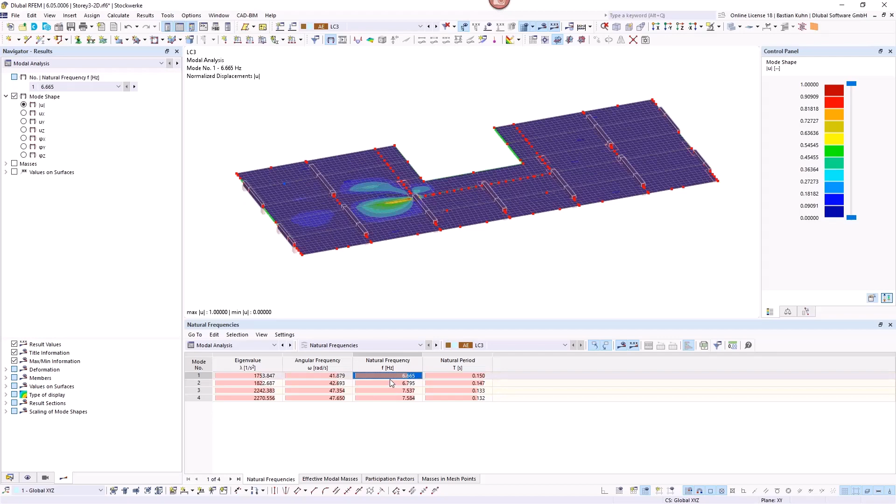And now the second criteria is the stiffness criteria. Therefore, in the maximally deformed part, you have to define a force, a single force of 1 kilonewton, and it should be below the deformation level of 1 millimeter. And when this is fulfilled, your verification is done.

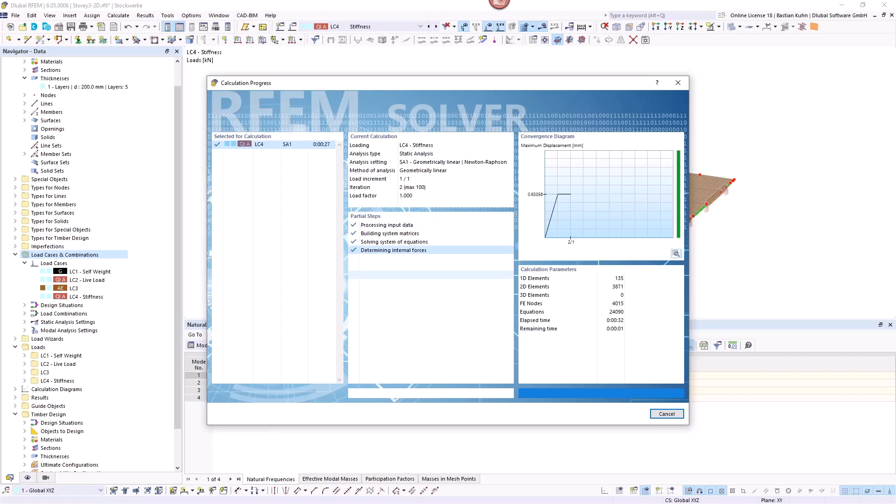Well, it requires that you have an option to calculate the frequency rate, and this method can be even more sophisticated than what I'm showing here. It would also be possible to analyze this with our software, but there you have to define a vibration on the structure and see how the damping in the structure works. As with these rules, we are below the level of 1 millimeter, so you can agree or argue that the vibration requirement is fulfilled and that it is okay.

Just as an option, because the simplified approach is really simplified. That's in the nature of such things.